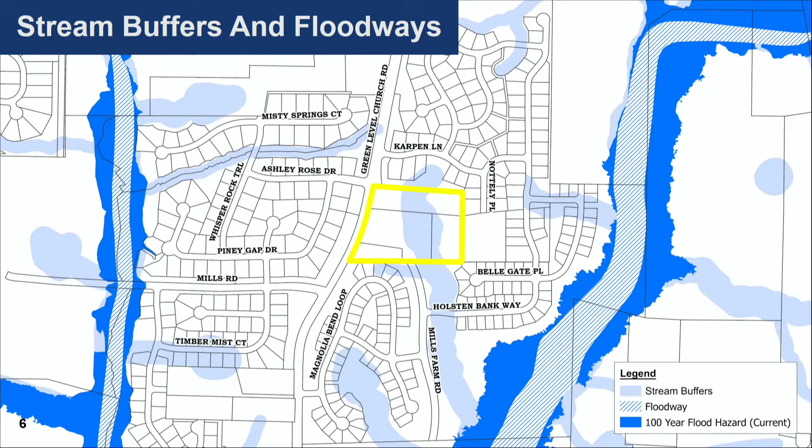The site consists of 4 parcels and is located between the Sutherland neighborhood to the south and the Toscana neighborhood to the north. According to Cary's GIS, there is a potential stream buffer crossing the property. Field verification of such features is required at time of development plan review. The site is located in close proximity to Thomas Brooks Park to the northeast.

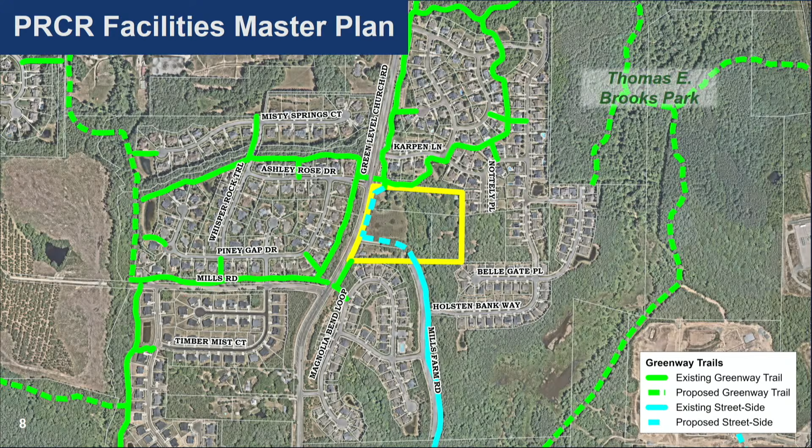There is a future street side trail proposed along both the future Mills Farm Road extension as well as along Green Level Church Road along most of the site's frontage, and this would help complete the current gap between the trail north and south of the site.

The site is currently zoned Residential 40, and the applicant proposes a rezoning to Transitional Residential Conditional Use, or TRCU.

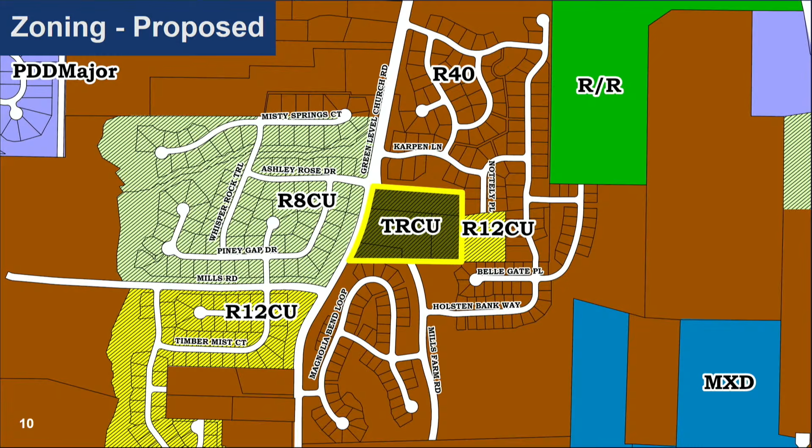The applicant has proposed several zoning conditions. These include limiting development of the site to a maximum of 39 dwellings, or about 3.5 units per acre. This was reduced from 44 units as proposed the last time the board evaluated the case.

Limiting uses to detached dwellings and associated neighborhood recreation and accessory uses. Previously, townhouses were also proposed. Providing a minimum of 7,200 square feet of community gathering space, which is 3 times the LDO requirement.

Providing a 60-foot wide streetscape along Green Level Church Road, which may be averaged as long as it is no less than 50 feet at any one point. This does exceed the LDO requirement by 10 feet. The applicant also offers additional plantings within this Type A buffer.

Providing an electric vehicle charging ready receptacle in the garage of each unit. Providing a decorative wood fence feature at the Mills Farm Road entrance from Green Level Church Road for consistency with the rural look of the area, and at least 5 additional understory or ornamental trees in proximity to the fence, which will be of a species native to North Carolina's rural areas.

Conditions further commit to calculating lot size separately from any stream buffers, which state general statutes otherwise would allow. Provide a 65-foot building setback from the closest lots in Sutherland to the south. Clarify no direct driveway access to Mills Farm Road.

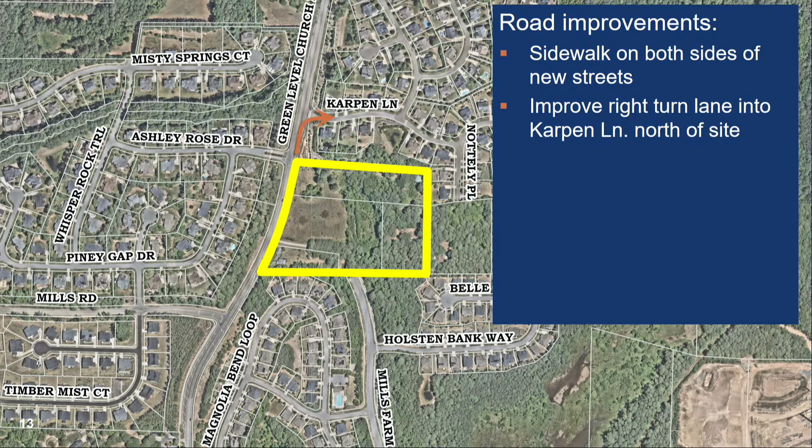Restriping the existing northbound right turn lane north of the site into Karpen Lane to provide additional storage length and/or taper length. Striping the widened pavement of the Green Level Church Road frontage south of the proposed Mills Farm Road intersection to provide a northbound right turn lane into Mills Farm Road.

And providing additional street lighting along the east side of Green Level Church Road from the site's northern property line to Karpen Lane.

An analysis of the request against the Imagine Cary Community Plan finds that policies in the Live, Shape, Engage, Move, and Enrich chapters apply most directly, as well as goals and policies of the Green Level Special Planning Area.

The proposed rezoning generally contributes to area housing choice on an infill site. The infill policy notes the importance of development compatible with adjacent residential neighborhoods, and with the removal of townhouses as an option, this appears to be more clearly met, although the density is higher and lot size smaller than that of adjoining neighborhoods.

This also speaks to the associated shape policy regarding transitions, and in this case, the use helps to provide a transition along with the Mills Farm Road alignment and additional 65-foot setback from the south, which will provide some separation for residents in Sutherland.

Development of the site would require the extension of Mills Farm Road, including the associated street side trail, as well as a continuation of that street side trail along much of the Green Level Church Road frontage, which will help provide additional multimodal connectivity in the area, addressing certain engage policies, modest improvements to nearby turn lanes and street lighting.

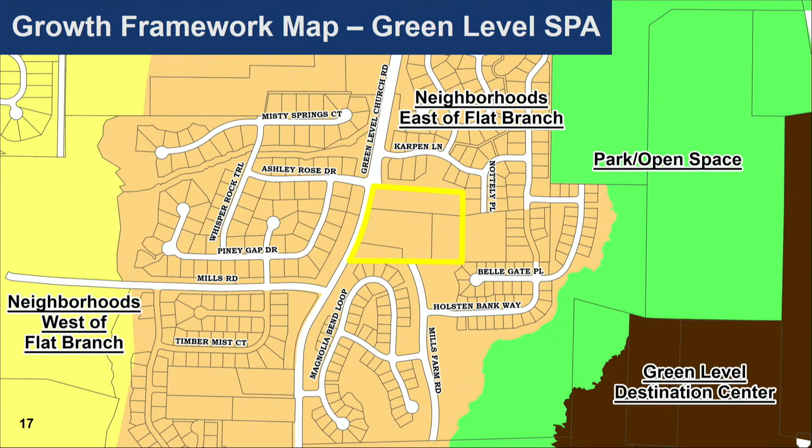This site does offer a slightly increased thoroughfare buffer of 60 feet compared to the LDO requirement of 50. However, as discussed in further detail in the staff report, many of the neighborhoods in Green Level offered wider streetscapes or bonus open space to separate and screen development from thoroughfares.

The 10-foot increase to streetscape width does modestly address the open space policy of the special planning area. No clustering is specifically proposed, although the site is somewhat constrained by potential stream buffers and the required Mills Farm Road extension. A decorative fence and additional native plantings have been proposed to help provide an aesthetic nod to Green Level and the nearby historic district, and the relatively small size of the site itself may help justify the smaller lot size and higher density.

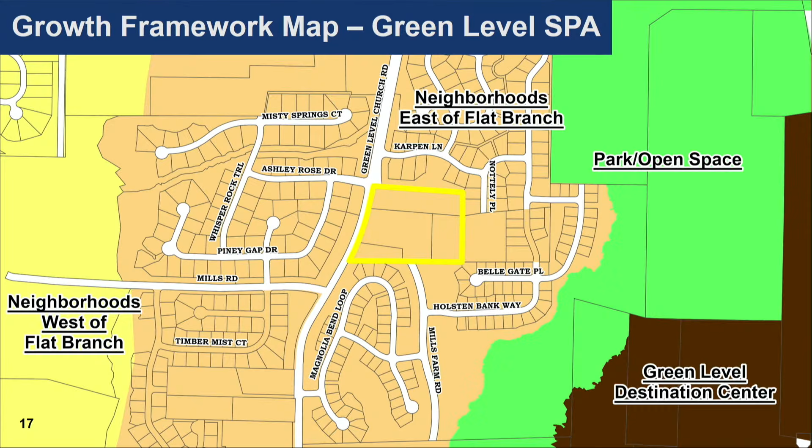The proposed density of 3.5 units per acre is higher than the recommended aggregate density for this area of 3 units per acre, and does exceed the density of other subdivisions in Green Level to date, including the 2 townhouse neighborhoods in this subdistrict. Currently, developed sites within neighborhoods east of Flat Branch range from about 1.1 to 2.7 units per acre, which means that the aggregate density of the developed areas of the subdistrict would still remain well below 3 units per acre if this rezoning is approved, even at that higher density.

The plan does also specify that higher density should generally be found closer to 540 and transition down towards the west, but the small area of the site means that the density transition can be generally maintained.

A virtual neighborhood meeting was held in July of 2022. Over 50 citizens participated in the meeting and had questions regarding parking requirements, community gathering space, and road improvements along Green Level Church Road and Mills Farm Road. A number of concerns were also expressed, including the need for an affordable or workforce housing component, concerns about traffic impacts, buffering of existing neighborhoods, drainage, density, and a general concern with townhouses at this location, as was originally proposed. That has since been changed to detached units.

Between the neighborhood meeting and public hearing, staff received 5 emails, 3 simply seeking information about the rezoning process, and 2 reiterated similar concerns as heard at the meeting.

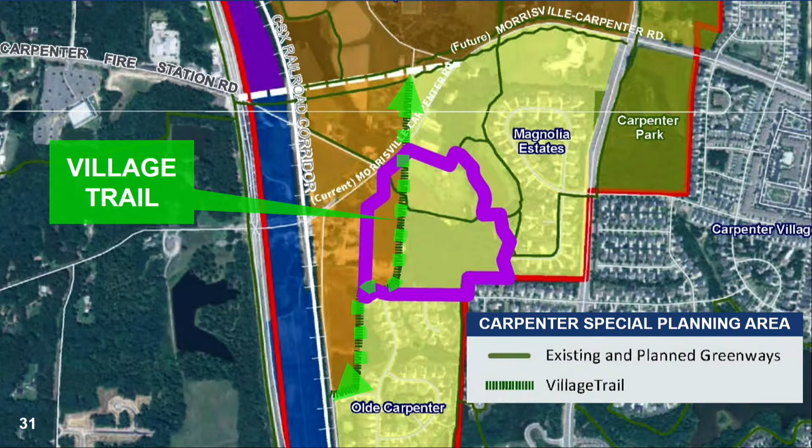The Carpenter Special Planning Area shows the conceptual alignment of several planned greenways, including the Village Trail, a character-defining feature of the Special Planning Area and a unique element within Cary's planning framework.

The Parks, Recreation, and Cultural Resources System Plan further refines locations of these proposed trails, and the applicant has committed to build the Village Trail along the western edge of the property and to build the portions of the Kit Creek Greenway corridor, which run along the boundary of the site.

The site is south of Saunders Grove Lane and north of April Bloom Lane. Braybrook Way stubs just to the east of the property.

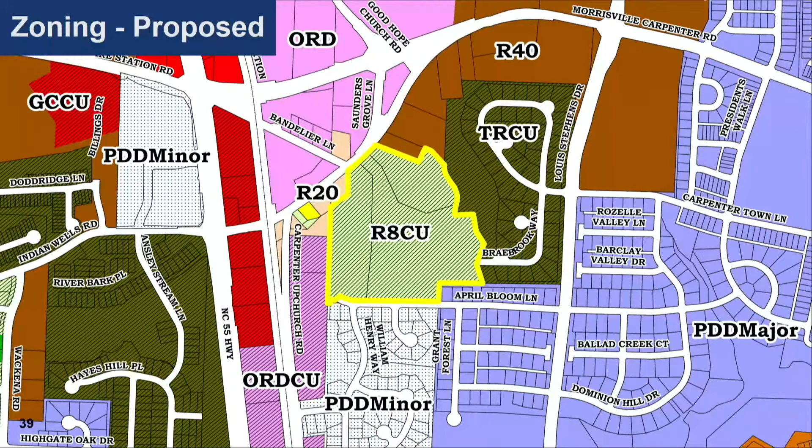The current zoning is Cary Residential 40, and the applicant requests rezoning to Residential 8 conditional use. The proposed zoning conditions limit the development to a maximum of 52 detached dwellings and includes a concept plan that illustrates the overall layout and several key zoning commitments.

The R8 zoning requires a minimum lot size of 8,000 square feet, and the applicant is committing that at least 40% of all lots will be a minimum of 10,000 square feet and will be located in the yellow pod areas as shown on the concept plan.

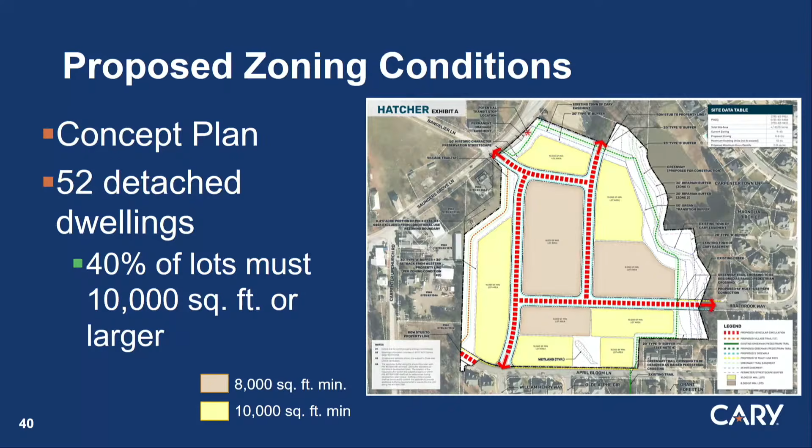Community gathering area will be a minimum of 7,000 square feet, 2,000 square feet more than the LDO requirement. Most perimeter buffers, which would otherwise be permitted on residential lots, will be on common lots, and the applicant has offered architectural commitments.

Non-traditional exterior building materials are prohibited, including vinyl siding, EIFS, and plastic composite lumber products. And corner lot homes must incorporate additional architectural details and foundation plantings on side lot facades.

Homes located within 100 feet of the Village Trail or Saunders Grove Lane, both important viewshed corridors leading into the historic Carpenter Crossroads area, must incorporate at least 2 traditional architectural design elements from an approved list, such as gable roofs or front porches. These commitments help ensure that the homes most visible from these key corridors incorporate design features that complement the character of the historic Crossroads area and reinforce the unique identity of Carpenter.

The Village Trail will be located along the western edge of the site as a 12-foot wide meandering, ADA accessible trail located within a 60-foot wide corridor.

Consistent with the Carpenter Special Planning Area vision, the trail will incorporate context-sensitive materials and design elements intended to evoke the area's historic character. The applicant also commits to providing at least 2 interpretive signs that tell the story of Carpenter's history, subject to review and approval by Cary Historic Preservation staff.

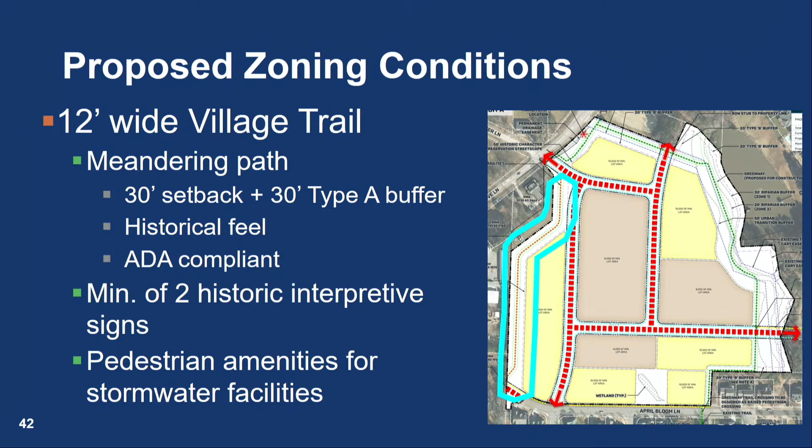The conditions also include multimodal commitments. A transit easement will be dedicated along the Saunders Grove frontage, and there will be a raised pedestrian crossing on April Bloom Lane.

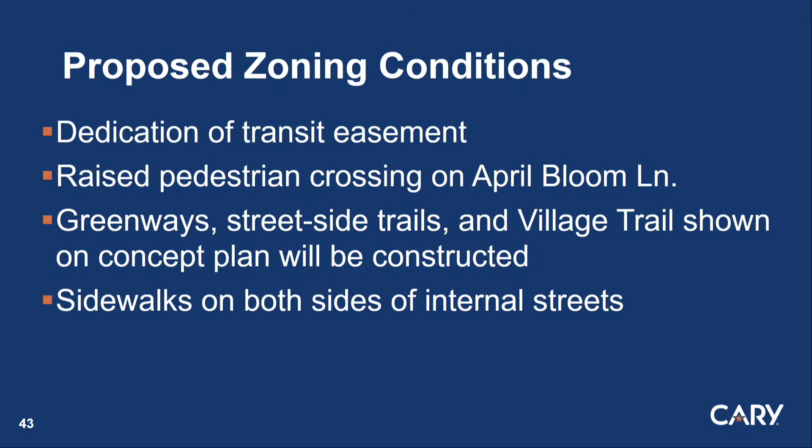Additionally, the developer will construct the greenways, street-side trails, and the Village Trail, as shown on the concept plan. Sidewalks will be constructed on both sides of all internal streets, where the LDO only requires sidewalks on one side of local streets.

Subject to securing the necessary easements, the applicant has offered to extend Braebrook Way beyond the subject property to connect with the existing street network.

The missing segment is relatively short, approximately 60 to 65 feet in length, and is located within existing public right-of-way. However, as written, there is some uncertainty regarding implementation because the connection may require easements from adjacent property owners that have not yet been secured.

The offer also does not include removal of the existing Braebrook Way turnaround bulb upon street connection.

The applicant has also offered a condition to put up traffic barriers to mitigate construction traffic to April Bloom Lane, which connects to the Old Carpenter neighborhood. The applicant has not offered such a condition for the extension of Braebrook Way on the eastern extent of the property, which would provide connection to the Magnolia Estates neighborhood should the necessary easements for the extension be acquired.

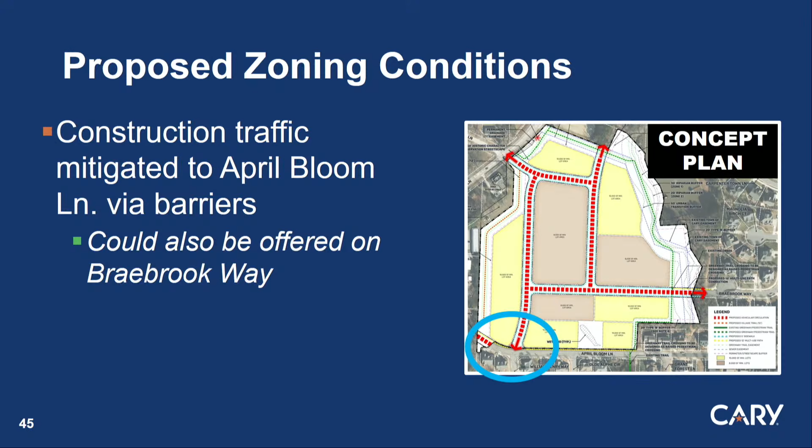Staff has evaluated the request with the Imagine Cary Community Plan. We note the Carpenter Special Planning Area has one of the most detailed and place-specific planning frameworks within the community plan. The subject property is located within 2 Carpenter sub-areas.

The Crossroads Village sub-area is envisioned as the historic heart of Carpenter, where development should be particularly sensitive to the area's historic character and rural setting.

And the neighborhood south sub-area is intended to consist of detached residential neighborhoods similar in scale and character to established subdivisions. The Village Trail is envisioned to provide place-defining connectivity and transition between the Crossroads Village and the neighborhood south sub-areas.

When looking at the policy guidance of the special planning area, the proposal includes architectural commitments specifically designed to complement the character of the National Register Historic District, including restrictions on exterior building materials and enhanced design standards. Use and form transitions, discussed in the shape chapter analysis as well, include a development program similar to the surrounding neighborhoods. The proposal would build the very first portion of the village trail through the site to help connect new residents and existing neighborhoods with community destinations.

The architectural commitments also help to meet historic preservation master plan goals, as does the offer for historic interpretive signage to share the history of Carpenter.

I'm going to try to keep my comments brief. I have a handful of things I want to touch on. I want to mention out of the gate that I'm here with Juan Montez of MI Homes.

MI is the proposed developer of this site, and I've had the pleasure of working on this case, fortunately not for the entirety of this case. Lord knows I've worked on plenty of zoning cases in the town of Cary that take three-plus years. I've only been involved since the fall of last year, and that's similar to Mr. Montez, who recently joined MI.

Since we took over running the case, our engagement with the community has been fairly direct. We volunteered to have that meeting in June, and it was a breath of fresh air. I don't do a whole lot of work in Cary where, after a neighborhood meeting, I walk out and say, man, that was a really good meeting.

I think everybody likes this project, and that's exactly what happened. If you watched the public hearing, the only speakers who spoke related to the case—they may have raised some thoughts—but each individual speaker who took time to show up spoke in favor. I think that's reflective not just of me or Juan being likable, but of a development project that has taken advantage of some bad case history.

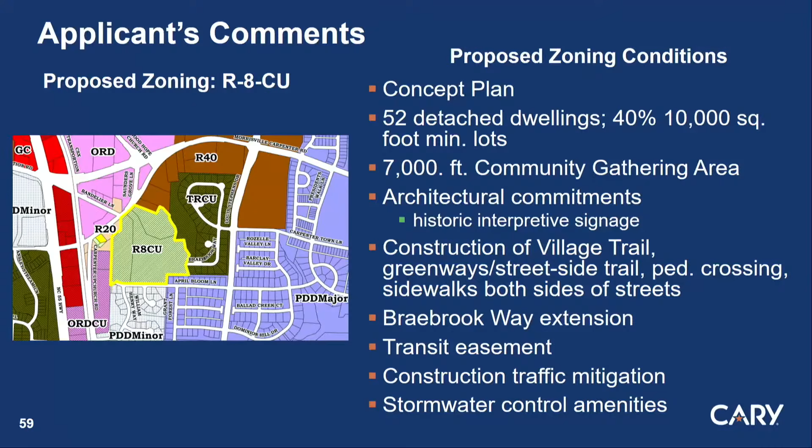As you heard, the community is also proposing a raised crosswalk to provide connectivity. For your edification, we've got 875 feet of the village trail along the western edge of the property, plus another 2,620 feet of 12-foot wide greenway or street side trail, creating 3,500 linear feet of greenway.

That's two-thirds of a mile of walking and multimodal path that will completely encircle this community of 52 lots. I've never worked on a community in the Town of Cary that, on a per lot basis, was providing more in terms of multimodal connectivity than this 52 lot single family detached community.

I took the math even further because I'm a math nerd. That's 42,000 square feet of pavement devoted to nothing but trails. That's almost an acre of pavement devoted to nothing but trails.

The point being, it's not an easy site in terms of making sure you're addressing all those multimodal connections. But I give credit to staff for working closely with the applicant, and credit to my client for making sure those things come to life. You're really going to be able to create a community that, in addition to the regular sidewalks adjacent to streets, has a very vibrant and active environment for people to get out and walk.

With respect to Braebrook, and this is that connection right down here, we have no problem connecting to Braebrook. Our condition acknowledges that. What we have a problem with is guaranteeing that in the event construction easements are required from the HOA, we can't guarantee anybody's going to sell us a construction easement. The town certainly has condemnation authority if it chooses to condemn construction easements for a future public street, which this will be. We're happy to go through that process, but we just can't commit as part of a zoning condition that we can guarantee those things will happen.

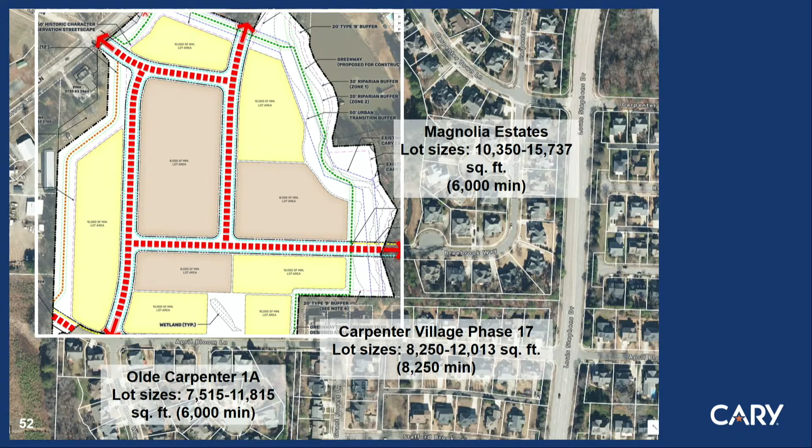That was it for me. I just kind of want to go through that. I have a handful of questions. One was, I didn't see it on the maps - is there an idea of where the stormwater amenity was going to be on this tract?

Is it down near the wetlands in the bottom middle? General locations are not shown for SCMs on this plan, but SCMs will be located on HOA open space and not on residential lots. SCMs will be placed at natural low points adjacent to established drainage features and consistent with existing natural drainage patterns. Stormwater staff did prepare me for that question.

I remember seeing some notes about how the pedestrian amenities were tying in, and it'd be nice to understand where it was going to be. But I also saw a slide that mentioned something about not allowing construction traffic at one entrance, but not mentioning it at Braebrook Way. I wanted to find out if there was a reason for that. It doesn't seem like Braebrook Way would need to be a construction access for this if they can get access off the other streets. So just curious if there was a reason why that was being left off.

I'll ask Mr. Barron to come up. Sure, great question. Because the folks who live on Braebrook didn't ask for it. That's as simple as the answer. We're fine with the condition. Staff mentioned that to us a few days ago about the possibility of adding that. It's not designed for anything other than the fact the folks who live on April Bloom asked for the condition and the folks in Braebrook didn't.

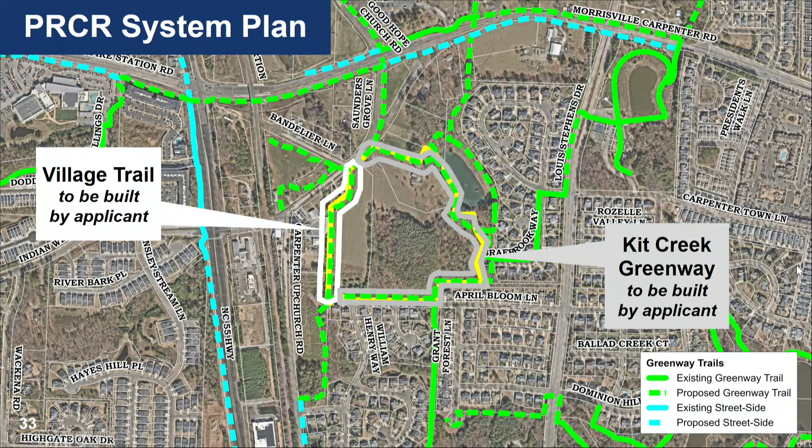Okay, and what kind of special treatments? There will be two interpretive signs, and then the actual materials themselves will be ADA compliant, but most likely a stained concrete or a brush surface. They'll have to be ADA, they'll have to meet our other specs, but here it's envisioned to be a character-defining greenway that looks different than other greenways in the network.

Got it. One last question: the temporary turnaround that Mr. Barron was talking about, is that located inside existing public right-of-way, or is it inside an easement? It is in right-of-way. So really, you're not required to get homeowner's permission to remove it, it's really just... Correct. Okay, thank you.

Ms. McAndrew? No questions. No questions.

And I realize he answered the question, it could get condemned, part of it could be condemned and connected by the town if they so chose. So it's not up to the developer. And then I guess on that bulb removal, if it did get removed, is it town-owned? If it got removed, does it become the town's, or does it become the HOA's?

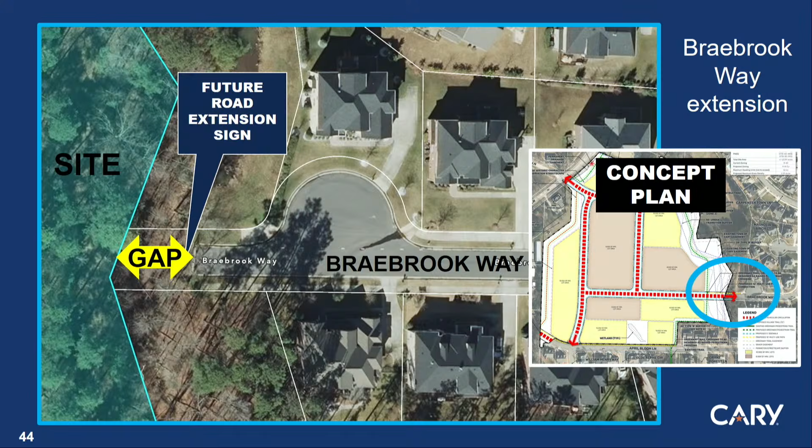So it's still kind of a buffer, right? It's public right-of-way. Looks like a stormwater device - is that a stormwater thing going through there? On the northern side, yeah, there's stream buffer here, and this is an HOA lot right here and right here. And so that's why the condition would be temporary construction easements. The HOA would have to work with them on that.

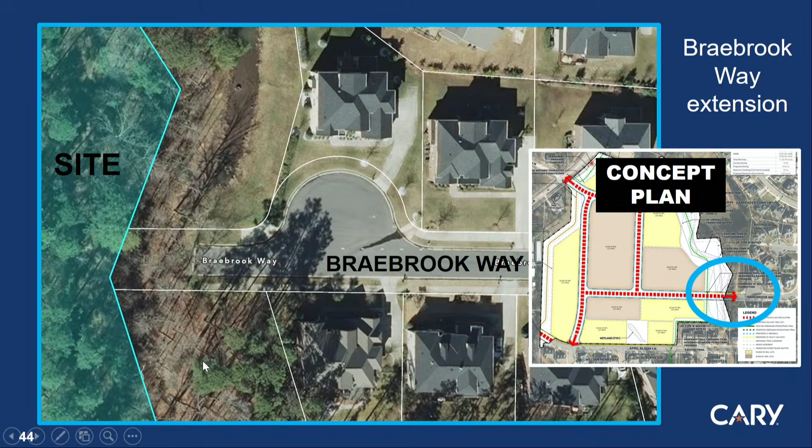That helps. And then let me tack on to what Mr. Barron said about - so they're going to have 1 acre of paved impervious. Is it going to be impervious surface? If we're going to pave a whole acre with greenway trails, are they all going to be impervious? Because then we're going to cause additional runoff just by paving greenway trails. Or do we also have an option to be pervious in greenway, especially in a sensitive area?

It's got to be treated either way. There are also competing goods in terms of ADA compatibility, so there are some things to think about with that. It will have to meet our trail specifications, so in terms of how pervious different specs are, I'm not able to answer that.

Yeah, but they will be ADA compatible. But they can be - there are ways to be ADA compatible and be material that's pervious, right? Either way, they've got to treat it. I agree, but it just seems like it's a lot - it's great for people to walk on, but I guess they have to treat that water either way if they're adding all that impervious. Well, it kind of fits this whole ecological thing here, so I'm just looking at the stormwater and everything, it just seems like there's a lot of pavement, great for people to walk on.